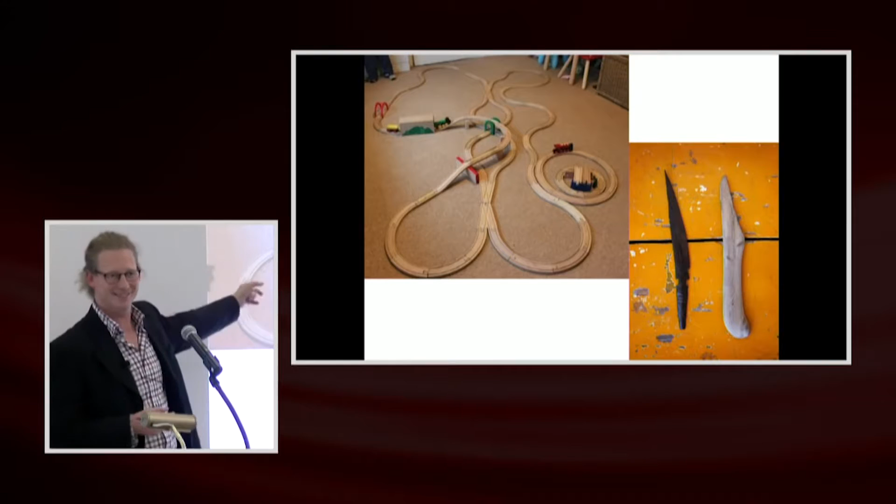In my life, as an engineer, I think I started off as a contractor, because first I started building. I started building especially trains in wood, the Brio. Then somewhere in my teens I moved a bit into manufacturing, fabrication side of things, and I tried to whittle letter openers and knives, but that didn't work out really well either. And then I moved into structural engineering.

And here I am on the site of the Metropol Parasol. I found that engineering is actually what I enjoy doing most, and where I enjoy trying to solve challenges and to keep challenging myself.

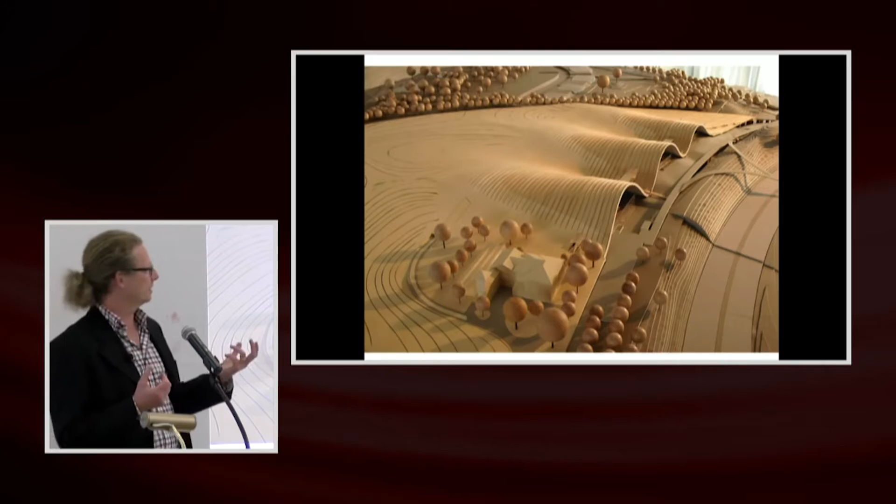To start off with some of the first projects I worked on, especially in the first five years in London, I worked on a wide range of projects, but there are a couple of common themes which slowly formed what I focused on in my later years. This is the Paul Klee Zentrum in Switzerland, which we did with Renzo Piano Building Workshop, which is a series of three hills in the landscape.

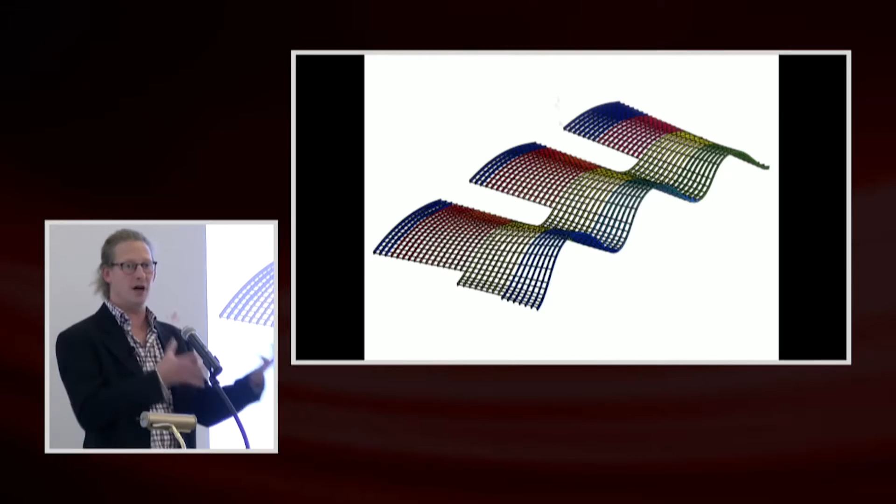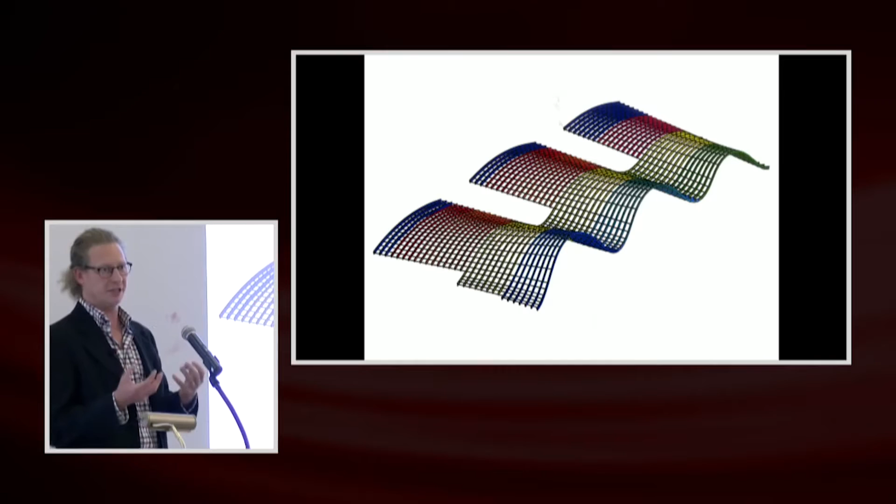And where I learned early on that geometry is key. In a lot of projects, geometry is really important in defining a clean and sound basis from which you can then move on and find structural and architectural solutions. Early in my career, working together with the architect, it wasn't really a common BIM model, because interoperability between software -- us working in Rhino and the architect in AutoCAD -- was still a bumpy road, but the intent was there to start off with one geometric model which we used for the entire building.

And here you can see the finished product of the steel arches and the undulation, and how they go back into the hills.

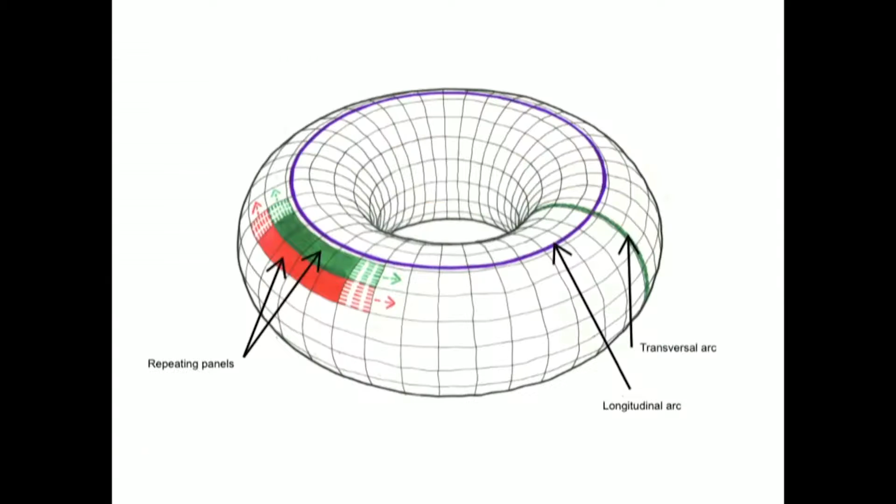Another project where geometry was also very important, but also constructability. This was my first foray into realizing that coming up with swinging geometry is all good and fun, but you also have to make sure that it's actually something constructible. Geometry still plays a large role, right? If the geometry is simpler, then the fabrication is a lot simpler.

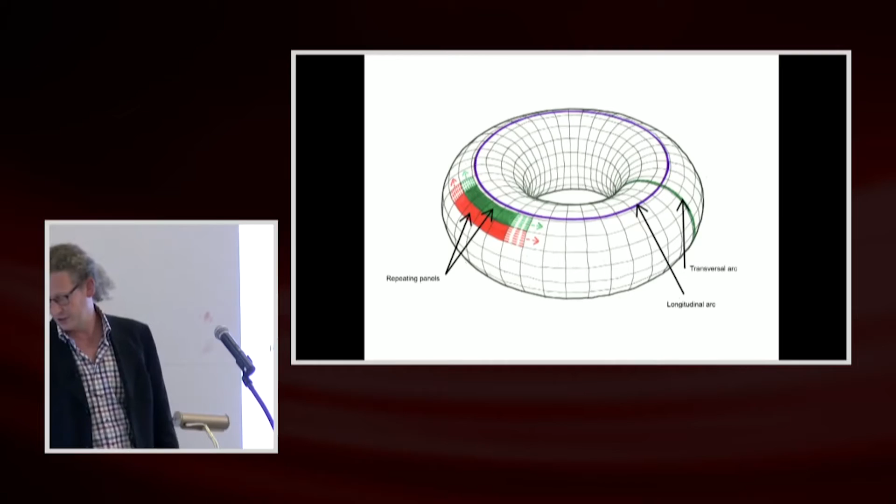Here, working together with the architects, even though this torus -- this donut -- has an immense radius, you boil it down and use tiny elements of that larger geometry to get down to the geometry of the building, and then move on to actually coming up with a solution, once again in steel, of this grillage which you can fabricate. Once the geometry is defined, you sit down with fabricators, sometimes early on, to come up with a solution for these canopies.

These are canopies in Portugal, down south in Vilamoura, for a port, for a yachting marina.

At the same time, not just concentrating purely on the geometry, but also looking at how figuring out the geometry influenced the structure, and how an architect and an engineer working together with the same geometry and the same model -- how does that collaboration work? Could we actually take it so far that two of us sitting at the same desk, working at the same computer, would that actually be a worthwhile effort?

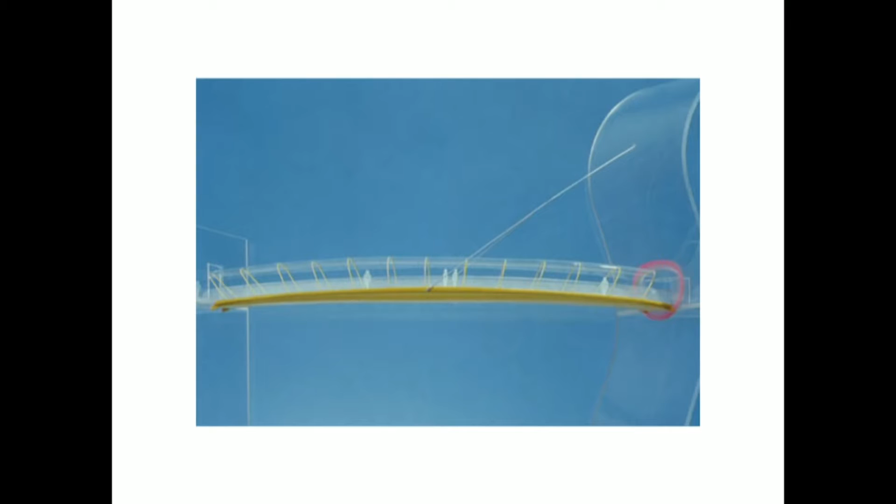I teamed up with Andrew Maher, an architect from Australia, who was doing research on collaboration of design teams, and we decided to take on a project. This is a bridge linking the Selfridges store in Birmingham with a neighboring building, and we decided: I'm going to come up with structural criteria, he's going to come up with his architectural criteria, and we're going to work on one model together. At the time we used CATIA, and we tried to optimize the structure to fulfill both of those criteria.

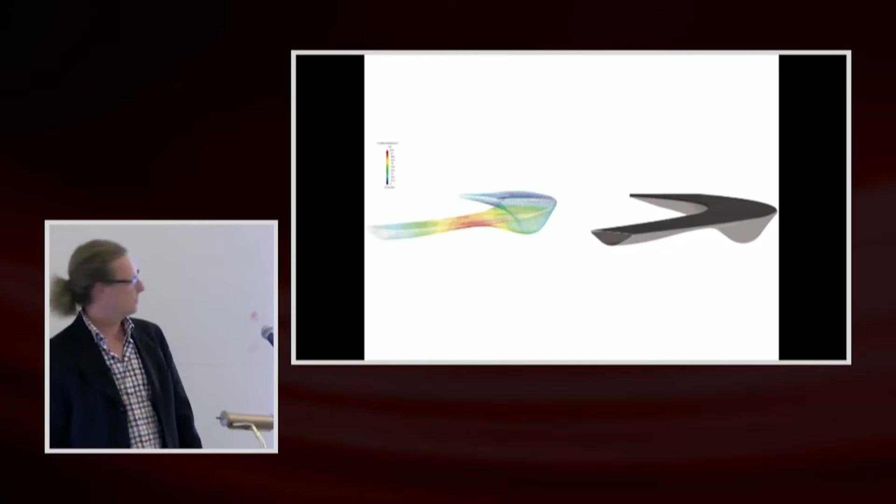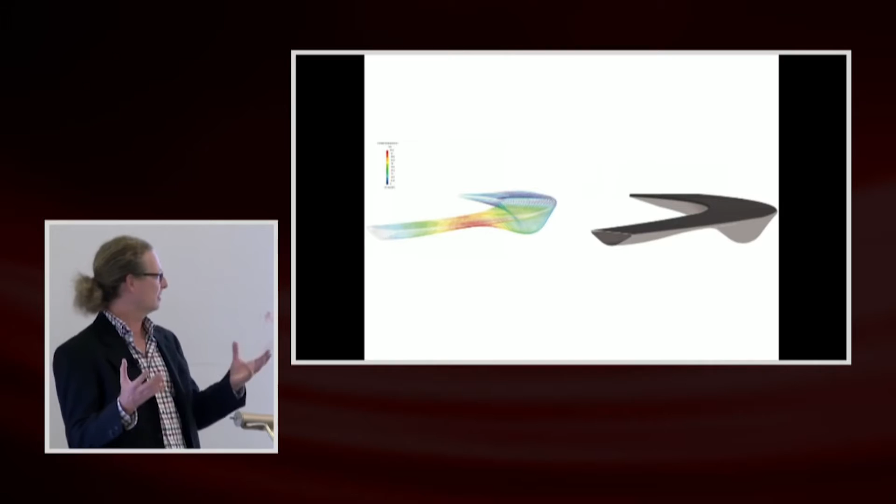It was the first run, and it kind of worked. We were also very lenient with our criteria. I wanted to have minimum deflections, and he wanted the aesthetics of the form. In the end, the solution we arrived at, both of us were kind of happy, but we noticed it was almost nearly impossible to 100% fulfill the two criteria we had set up at the beginning. But nonetheless, it was a really good experience, especially sitting next to each other at the same desk and communicating every now and then when the need arose, but actually working like four hands and almost from one body.

That kind of collaboration, team effort between engineering and architecture, we took a step further with a project in Hong Kong: the West Kowloon Cultural District with Norman Foster. At the time it was all one big development, one big project with all the museums and everything, and it was all covered by one large canopy. This canopy is about a mile long.

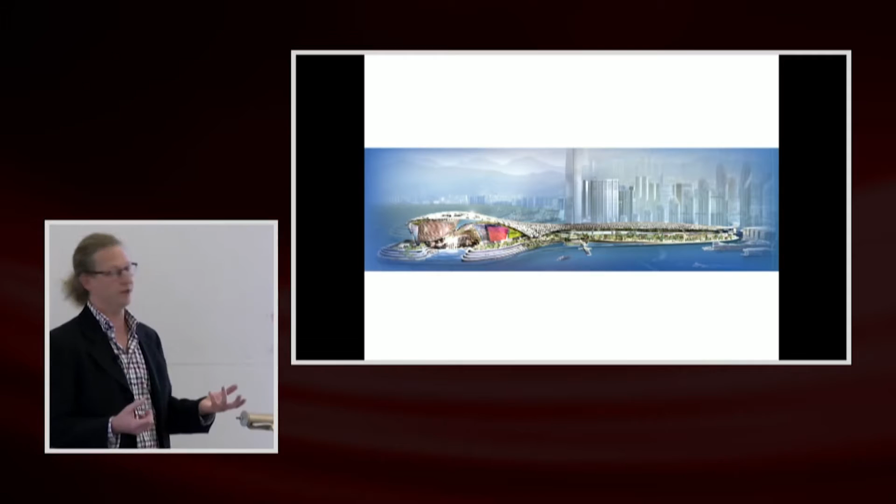During the competition phase for the developer, we set up a project office near Foster's office in London, where three of us from the engineering team were working together with the architecture team.

It was dictated for practical reasons. We had a timeline, we had a lot of things to work through, but also we were trying to find the most efficient design process, ensuring that all ideas are always thrown back and forth, and lighting up that design process to try to get as many ideas out of it as possible.

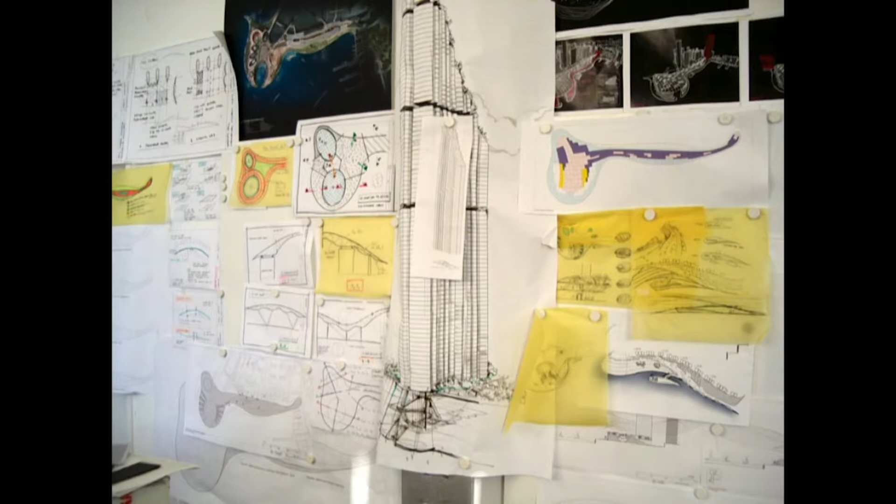We had a big pin-up wall where at any time, even if we were working by ourselves, it would go up on the board, and then we'd have almost every two hours spontaneous discussions at the board to go through what we were working on, or just get together spontaneously at the table and try to find solutions for all of these structures and that canopy.

On that project, it worked really well. It worked very, very well. Maybe because the design criteria for the project were set by the client, who had his list of things he wanted, and a lot of them were more defined by architecture, others by engineering, and we had to work together to a combined set of criteria set up by the client.

Moving a little bit into parametrics and optimization. This is another collaboration with Australian architects, a pavilion with a random geometry and the intent of optimizing the nodes, where the common geometry and an engineering analysis model, through an optimization process, then actually define the geometry of the nodes. So basically, where there's more material is where the forces are going through, based on the geometry of that random pavilion.

So each node is completely different, but also each node is a lot lighter, so we're saving a lot of weight because we're only putting the material where it needs to be.

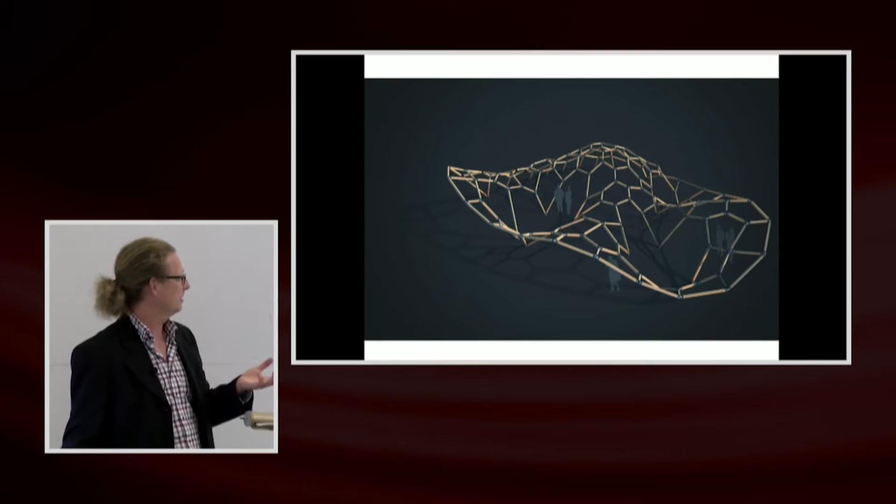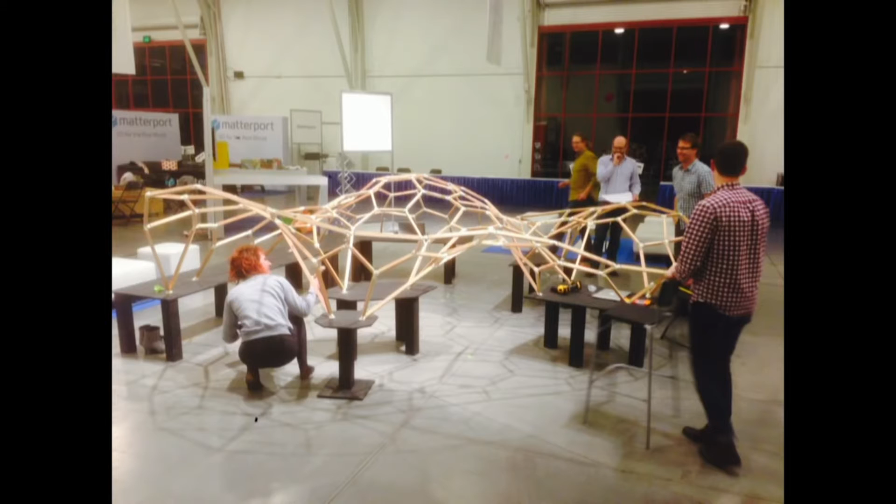We built a 1:5 prototype, which actually fit in his suitcase. He came from Australia to San Francisco, to Fort Mason, for one of the Autodesk conventions, and packed it into his suitcase. Then us architects and engineers together, we set up the 1:5 version. Here we found out that the erection sequence was actually quite critical, something we hadn't taken into account at all, because cutting and milling all the individual nodes, 3D printing them, was easy, but actually putting them together while looking at the Rhino model on screen was pretty darn difficult.

We also looked at the material for this structure, and these are all straight wooden elements, so the fabrication of those was also very straightforward.

So this little wood pavilion takes me over to timber, and to put it into perspective, this is kind of a historical timeline. This is back 2,000 years ago, and this is 500 years ago. It seems that actually what we're doing in timber construction, we're getting smaller and smaller, and we're not reaching what previously was done with timber in the built environment.

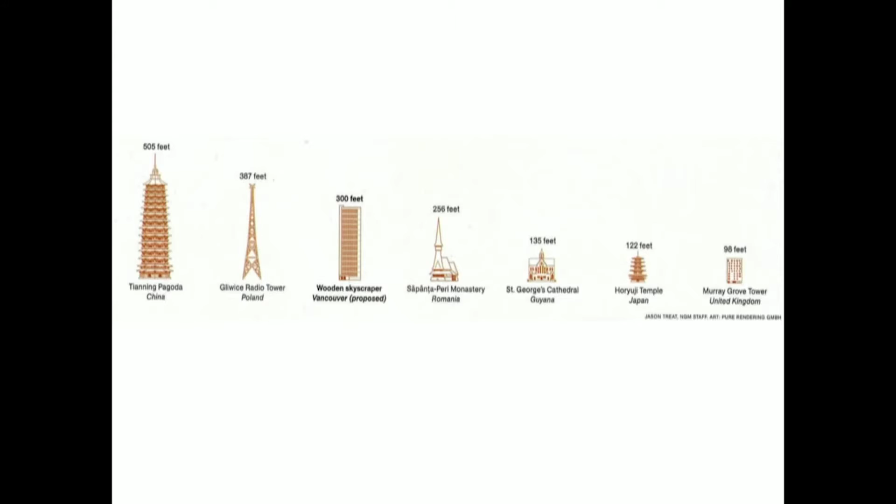There are temples in Japan, actually older than this, from the 12th or 13th century. There's stave churches in Romania. There are windmills in Germany, about 100 meters tall, which are now being built, so we're slowly getting back to that.

But timber can also be used as a reused material. You don't always need a new material. So there's a lot of facets of wood which fascinate me, where we can actually use it a lot more than we're applying it at the moment. This here is a sculpture in Seattle, made from wood of an old schooner, an old boat, which was put together for a sculpture.

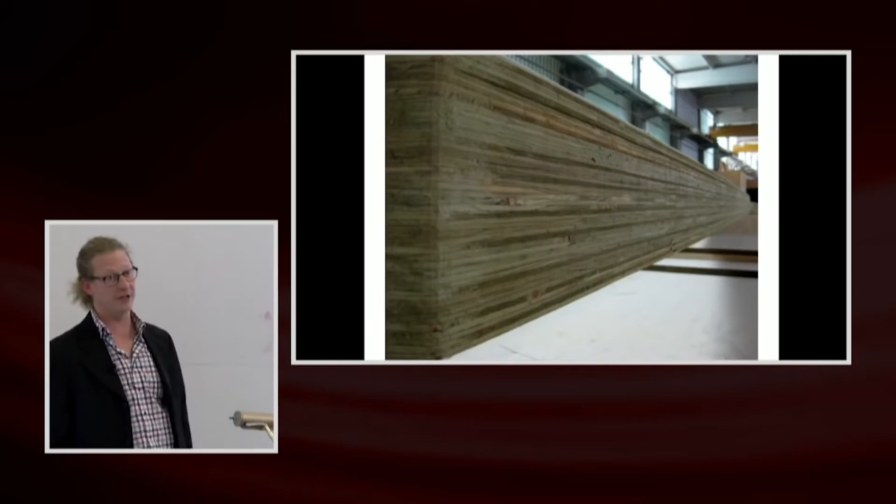There's a lot of engineered wood products out there. This is laminated veneer lumber, which has a lot of possibilities. I'll show that later for the Metropol Parasol.

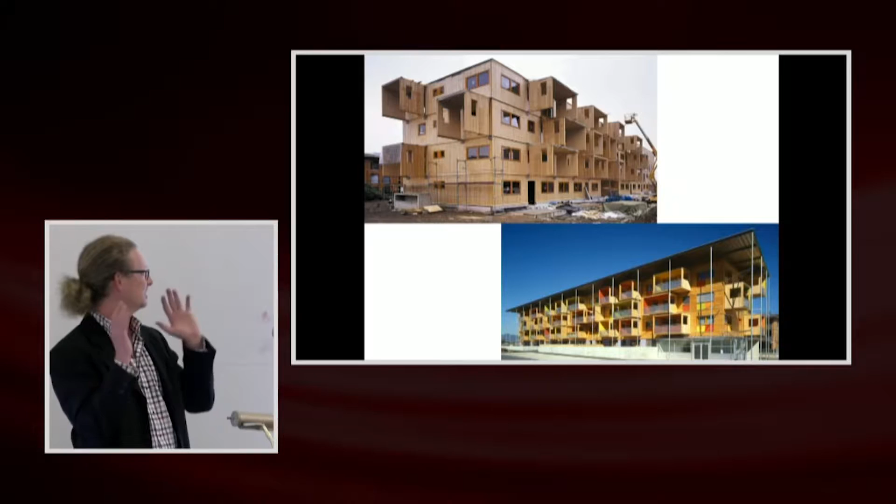But even normal residential construction, something which here is just normal stick frame, can be used with CLT. In Europe, a lot of these buildings—it's not something fancy, not something special—it's important residential construction built with cross-laminated timber.

Oh, sorry, am I not close enough to the mic? Yeah. Or I can move this a little bit. Yeah, no problem.

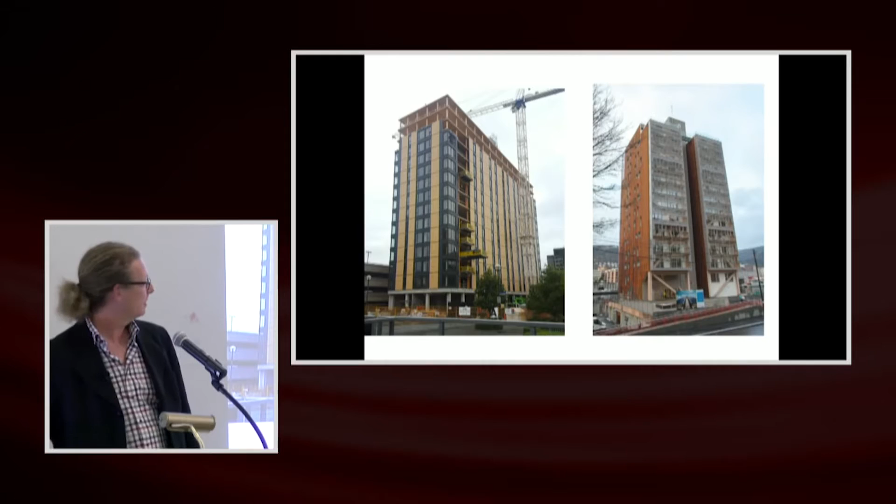In some projects in Europe and in Canada, we can see there are buildings taking us up 20, 30 stories with wood structural solutions. I started working with timber also back in 2002.

This is the Chesa Futura in Switzerland with Norman Foster. It's completely a glulam beam and column structure sitting on a steel raised table.

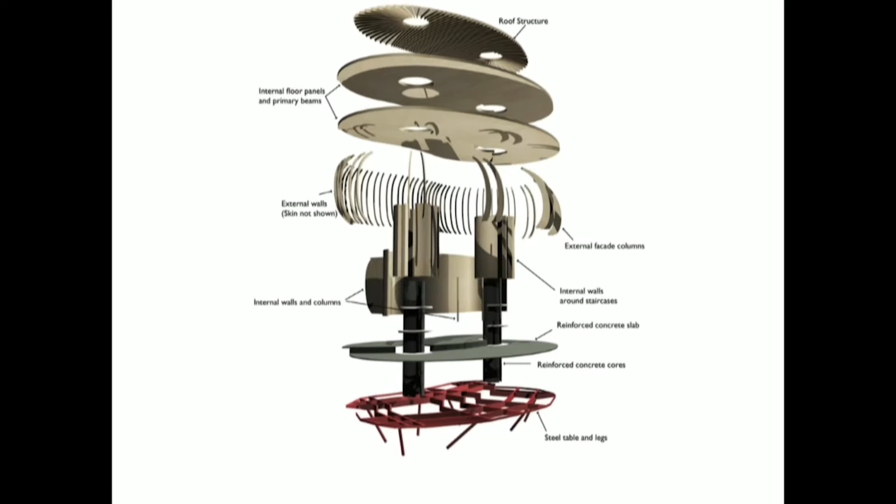This is a kind of first BIM model that we had for the geometry and defining the areas of common curvature. And here's the timber structure, where we also worked with the fabricator to figure out what was actually possible on the fabrication side, using those limitations to come up with our structural system.

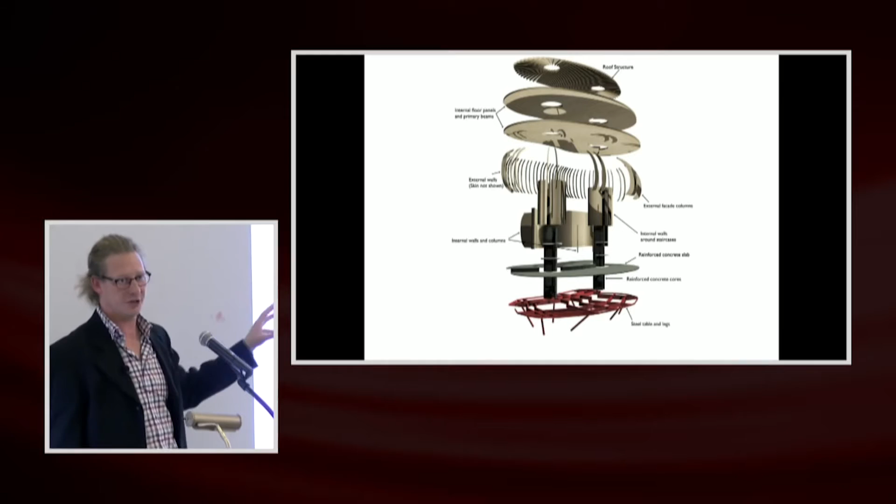Here, the strength-to-self-weight ratio of timber was really practical, since we were up on stilts and wanted a lightweight structure.

And also for the cladding, we also used wood. This is larch from the same altitude, cut by a shingle fabricator two villages over. This larch was used to clad the entire wooden structure and to protect it from the elements.

And then, in 2006, I started working on the Metropol Parasol. This is in Seville, Spain, for those who haven't seen any of the images. It's basically a large shading sculpture to shade a large plaza down in Seville.

The original site, when the design competition was announced, was actually a parking lot. So this is the square in Seville. First they thought, okay, we'll just build a shopping center. So they immediately started excavating on site, and then they found these Roman ruins—which shouldn't really be a surprise, since Seville was an old Roman colony, so you dig down 15 feet and immediately encounter the Roman ruins.

But it was good, because politically there was a new mayor elected, and he thought, up in Bilbao they have this beautiful Guggenheim Museum, and now Bilbao is all of a sudden on the map. I want something similar down here in Seville.

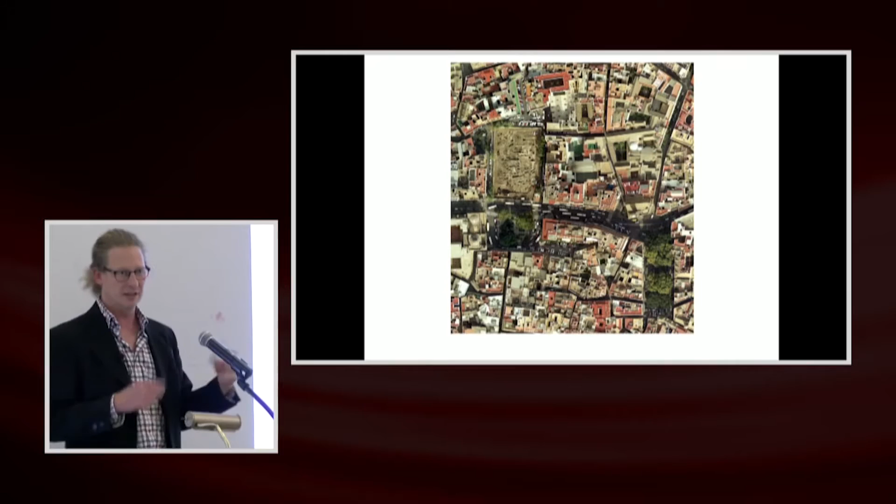So he announced this design competition, and we entered with Jürgen Mayer, an architect in Berlin, at the time more of a local young architect, and with this submission we won the design competition. You can see the original competition submission is actually different from the final built version, and I'll take us through that design process in more detail.

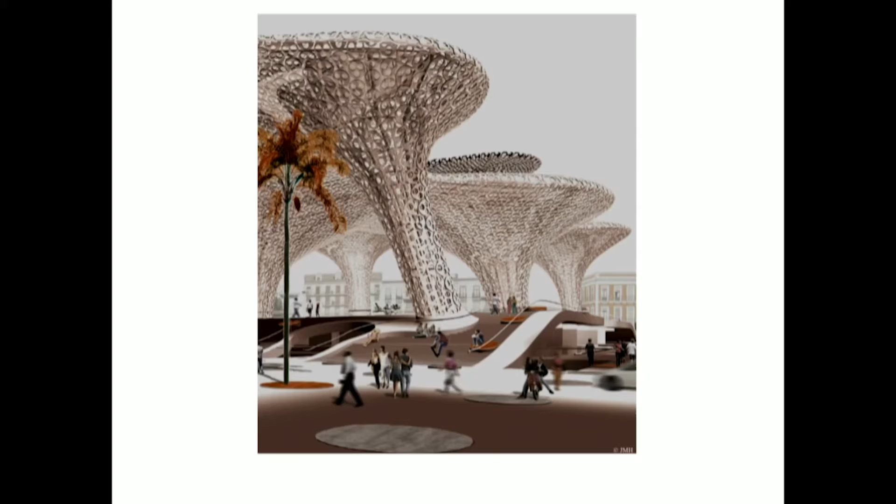The team composition was also quite interesting on this one. The architect was from Germany, Jürgen Mayer, ourselves, Arup, for the engineering, from Madrid, together with other offices. It was organized as a concession—a concessionaire won the project from the city and had a 40-year concession to build it, maintain it, and operate it.

And that was our client, Sacyr, who are more in the market for highways, bridges, heavy-duty civil concrete work. Nonetheless, they tackled this, and it proved difficult, but in the end we also managed to work with the contractor.

Quick overview of what is actually going on.

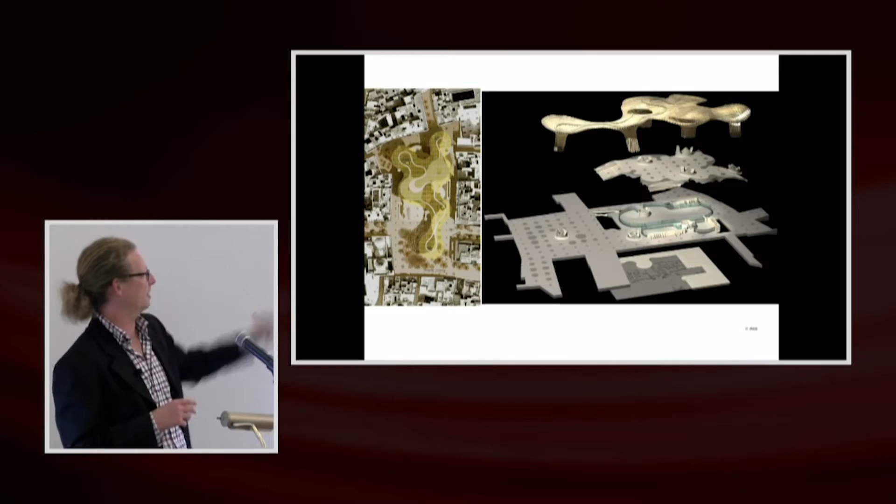In the basement, the museum incorporates the Roman ruins that were found on site. At street level, the entire plaza is refurbished. An old marketplace, a fresh produce market that used to be there, moves back in at street level. Then there's an elevated plaza over it, over the farmer's market, and then we have the parasols that shade the entire square.

At the competition phase, we were actually thinking more about a steel structure. We had these cores or trunks for the parasols, so we thought we could make those out of steel structures and then cantilever out and connect the cantilevers, kind of forming a space frame. But it was all based on cantilevers, and cantilevers aren't the most efficient structure.

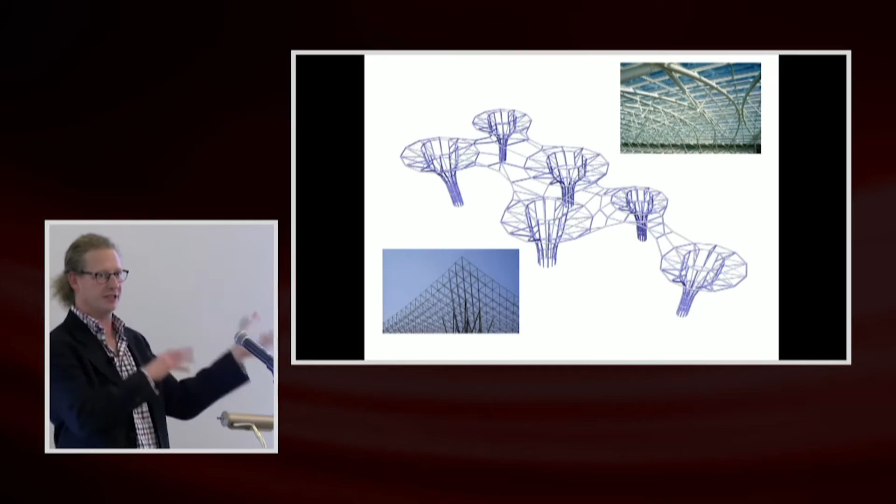And this was also a separation of structure and cladding, right? It wasn't really a holistic concept for this shape.

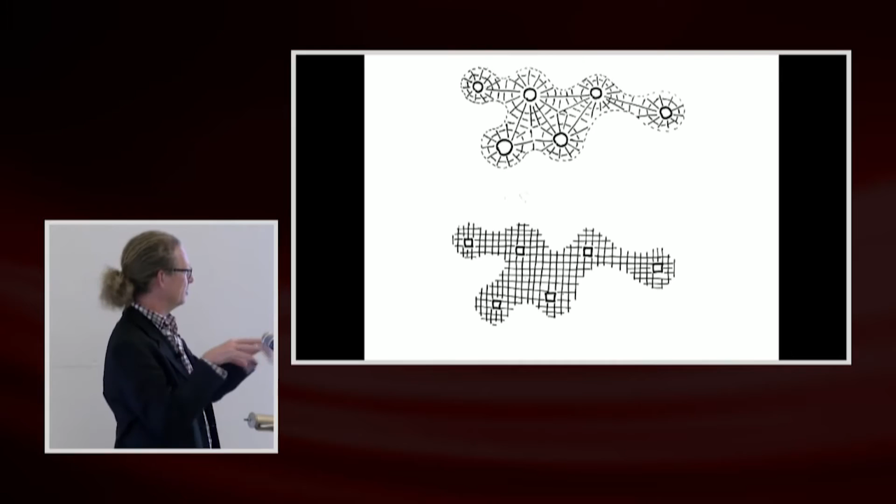So we started exploring many different kinds of structural solutions for these parasols. We looked at single layer curved structures, also doubly curved structures, and then finally moved away from the concept of having individual trunks or stiff cores, branching out to one grid, one concept for the entire parasols, almost like defining one grid and then just shaving away to form the final geometry.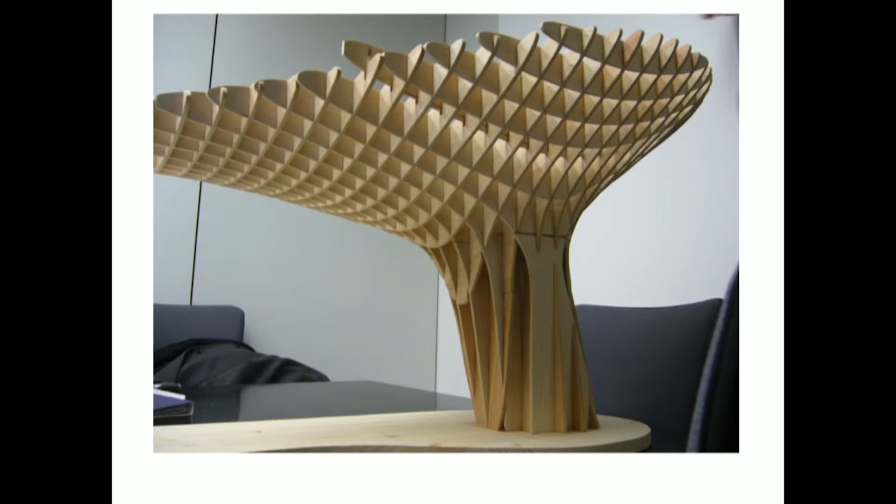At the same time, we were talking with the timber contractor, basing it on those balsa dinosaurs you get in a flat pack, which you take apart and put together in an interlocking fashion. So you're using really simple elements to come up with a very difficult geometry. The contractor loved that because all of the elements basically just have single curvature and can be cut out of rectangular panels.

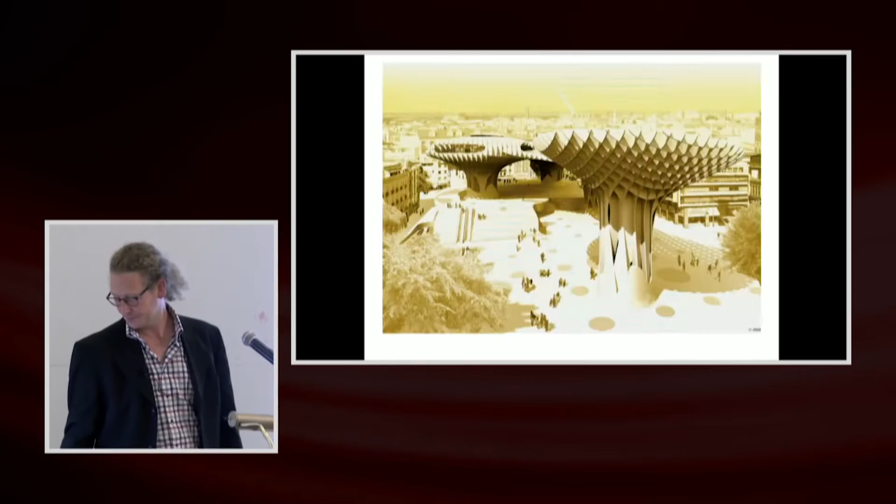So the original competition scheme actually changed, and we went back to the city and said, look, that steel structure which we came up with originally, that's not what we want. We have a more lightweight structure. This is also right because the parasols are mainly carrying their own self weight, with a bit of live load from walkways and a bit of wind. So the self-weight to strength ratio is really important.

Maintenance-wise, we took care of that by coating the timber with a layer of polyurethane. We then presented the city with this structure, this solution, and the first reaction was, 'Wait a second, timber? You want to build something out of wood?' Because in Seville, nobody builds anything out of wood.

But we managed to convince them, and then we moved on to start defining the structural solution, especially the connections for the parasols between the elements. The comparison I had previously to interlocking, that intercombing, doesn't give you enough stiffness, and you can't really transfer forces for the spans that we have for the parasols.

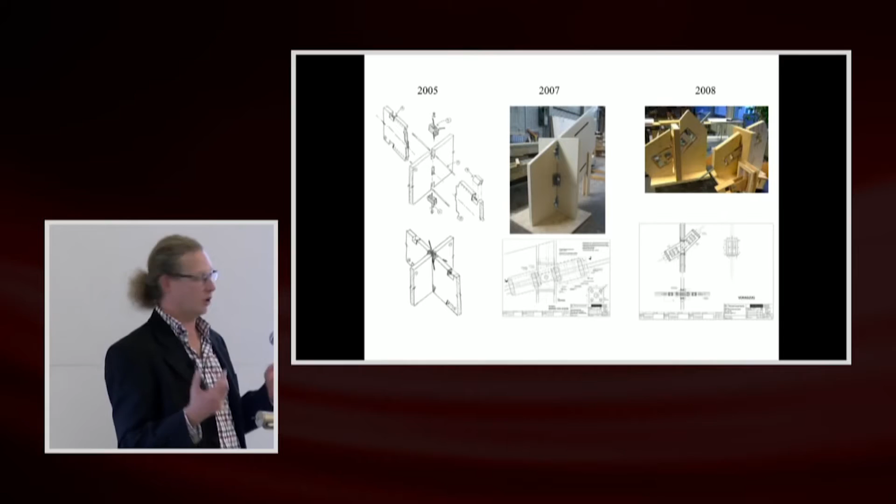So we had to come up with a solution which could transfer the forces but also did not add additional weight to the structure. Usually we just insert steel bars and transfer the forces, but all that steel we would have needed would have put more weight into the structure, and then we would have had to increase the size of the steel, and you get into that loop.

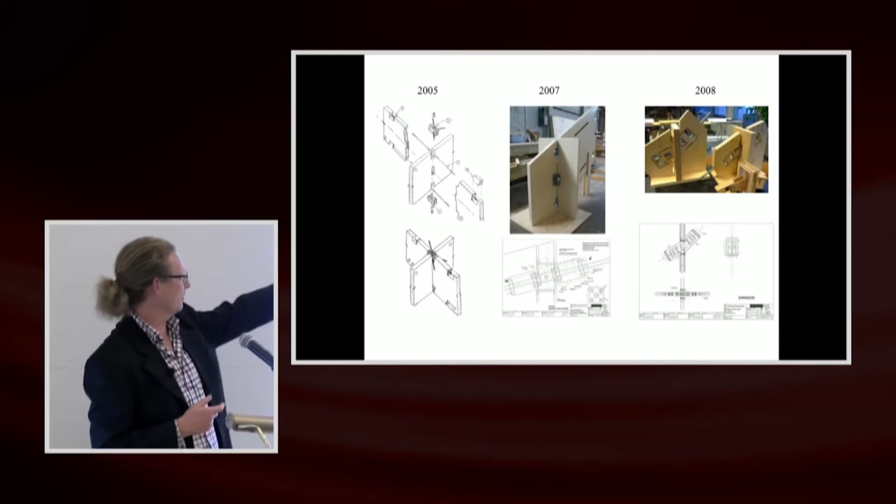So we had to look into variations of cutting away wood, or on the far right, even using wooden plates instead of steel plates, trying to find something that respected the original geometry, was lightweight, and could transfer the forces. Then we started talking with some epoxy experts who were mainly doing research in doweling steel bars and epoxying them into concrete.

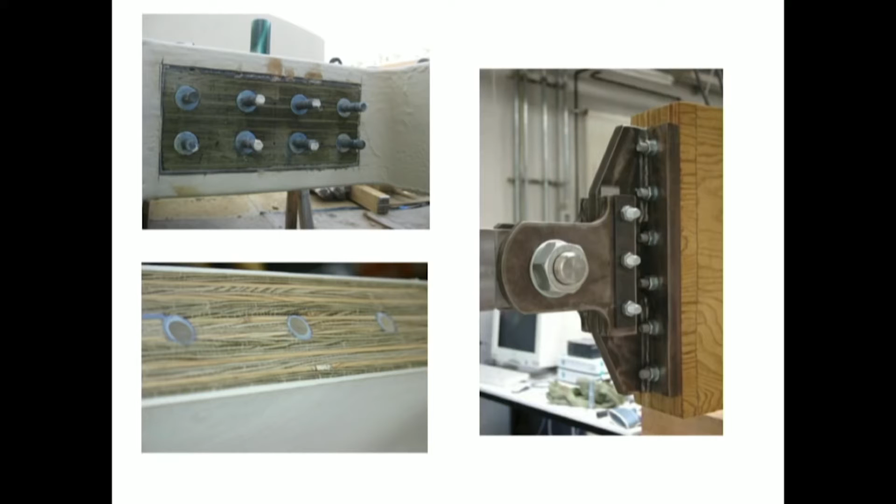Why not do that with wood? Why not insert the dowels directly into the wood and transfer the forces with epoxy? We came up with a concept for that and built our first specimen, which we then started to test, because there were no values, no code, nothing to really tell us how much force, or what kind of forces, we could transfer.

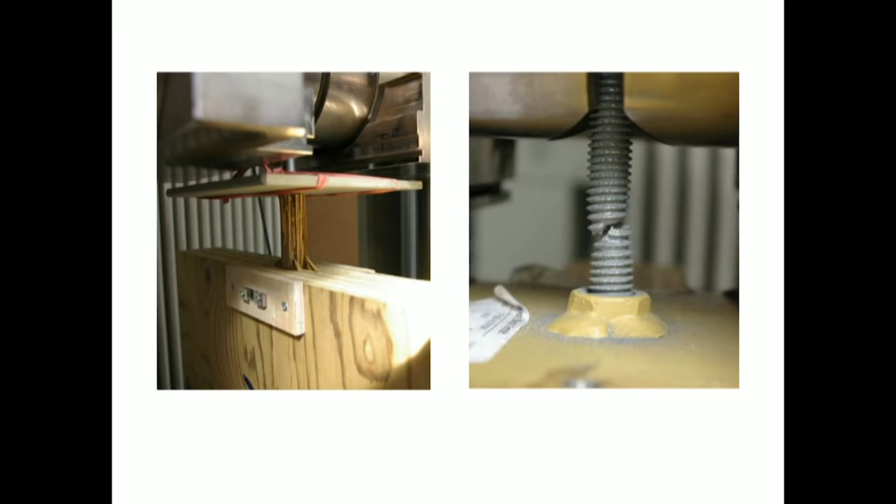Our first test failed. The wood is what actually failed, and wood gives you a brittle failure, a failure without warning. So we changed the grade of the steel and ensured that the steel, which gives you a ductile failure, would be our failure mode.

We also had to test it for heat, because in Seville it gets really, really hot, up to 120 degrees in the summer. And then, of course, there's also the radiation onto the steel and how it transfers down the steel rods.

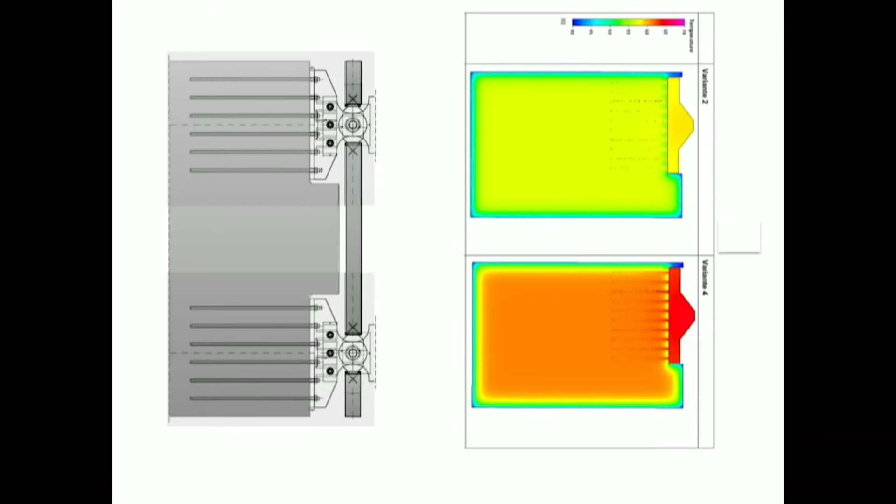But epoxy is an interesting material. We had to consult with experts from other fields and bring them in. You can cure epoxy on a molecular level and tell the molecular connections to actually resist higher heat. So you put them in a kiln, basically. You turn up the temperature, and it's a curing process for the epoxy. You leave it at that temperature for a while, and it actually resists the temperature you've fine-tuned it to. That happens on a molecular level.

So that way we could ensure that it could also resist the temperatures down in Seville. That was a really tricky one to convince the client, because they were kind of old school engineers sitting in the city building department. Luckily, one of the main engineers there was kind of mulling about the idea.

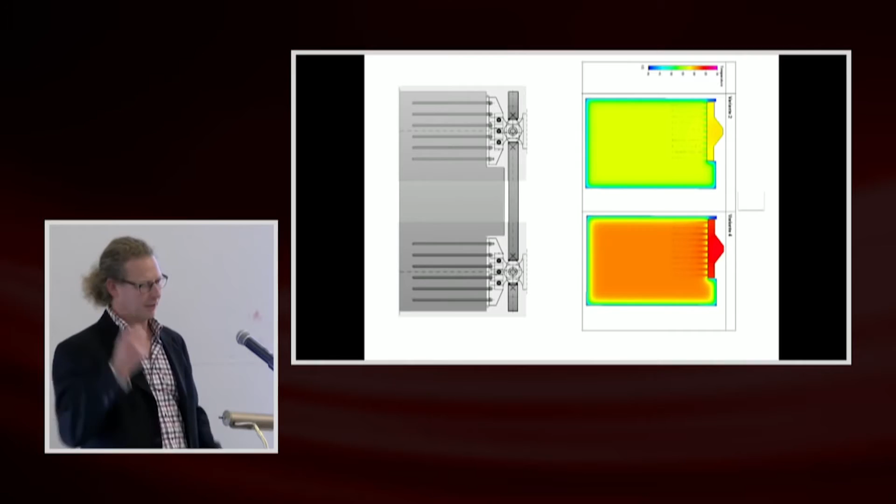So you're not doing a mechanical connection, it's actually a chemical connection, so how does that work? And the chair he was sitting on was luckily a brand new chair with no bolts, all glued together. He said, well, I guess if the chair I'm sitting on works with chemical connections and is glued together, then the parasols will work too.

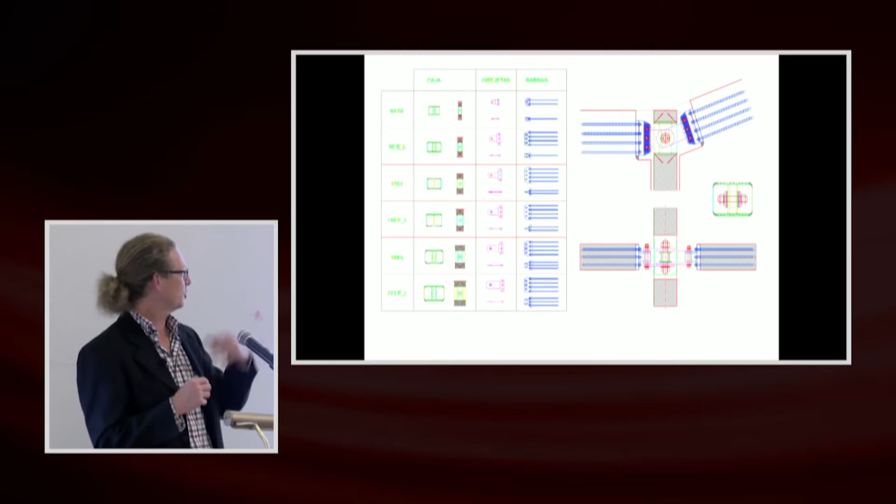So it was actually pretty easy in the end to convince him. We moved ahead, and once we had the solution, we went on to an optimization. Now we know how we can transfer the forces. It shouldn't be too heavy, but we also don't want 10,000 different connections. So we wanted to set up a kit of parts, and each connection is assigned a connection from that catalog. This is the first catalog we came up with, which just had 6 different connection types.

As we moved forward, we found out that we actually had to expand that to different connections, not only based on the forces that they transfer, but also the thickness of the wood element we're actually connecting to.

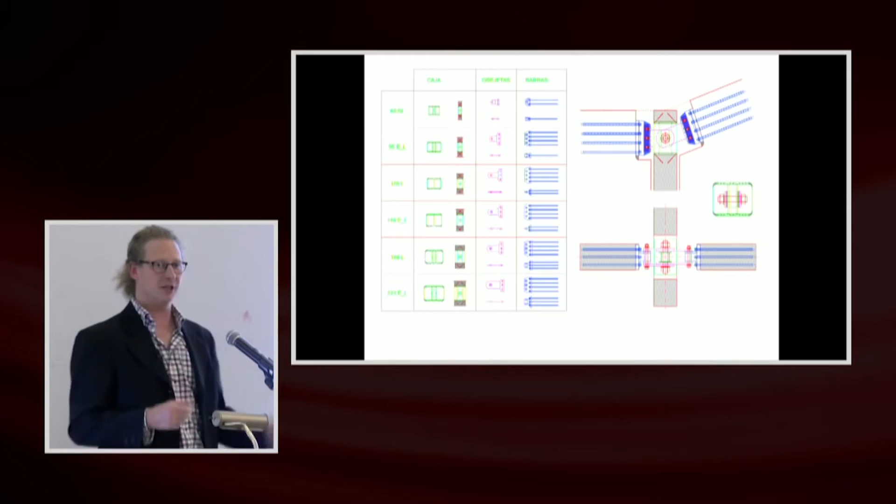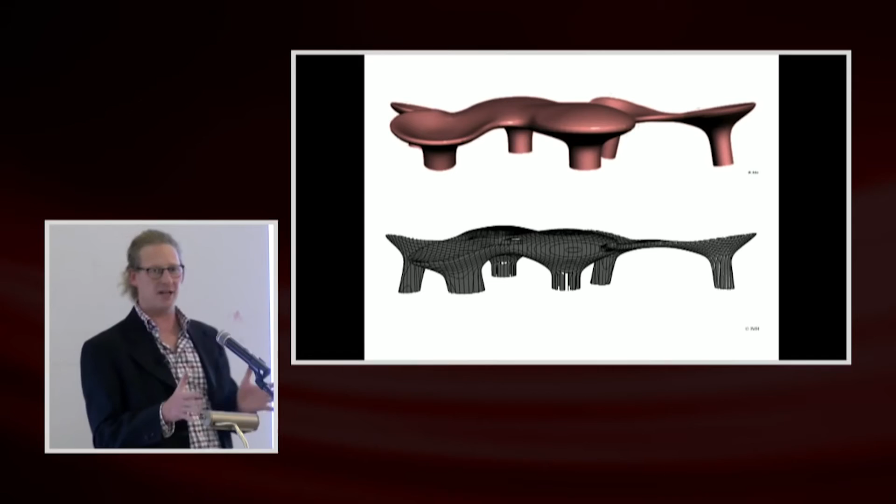So this is the beginning of our BIM model and the optimization loop that we went through. That's the architectural model in Rhino. It was fantastic because Jürgen did not change the geometry once in 5 years, over the entire length of the project. They defined it in Rhino and said, look, we need something that's constant, and they didn't tweak it at all. So while you might think, oh well, that's a pretty difficult constraint, it was actually really good because you had something fixed and unmovable.

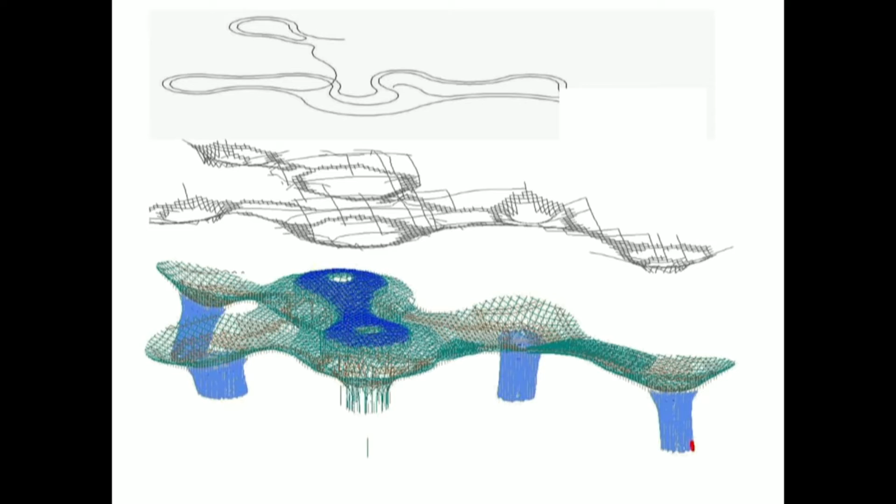So we imported that into our analysis software, GSA. Quick description of the software: it's basically a two-way spanning grillage of beams, but due to curvature, we also get some shell action. For in-plane stiffness against some of the wind forces, we also have steel diagonals which crisscross between the squares.

We tried to place those underneath the walkways, so there's walkways on top of the structure, so the visual impact would be minimal. Then you can see the four wooden trunks, and in the middle the parasols kind of open up. There's a cafe at high level, but that's a separate structure due to the high live load and fire resistance criteria. There we have a steel concrete composite structure and concrete cores, which house elevators for access and also for services.

So to actually optimize and define all of those connection nodes while always taking into account the weight of the connection, we linked our structural model to an Excel spreadsheet with Visual Basic. Then basically we started at step 0, and we gave all the elements the same thickness, and we gave them the simplest connection.

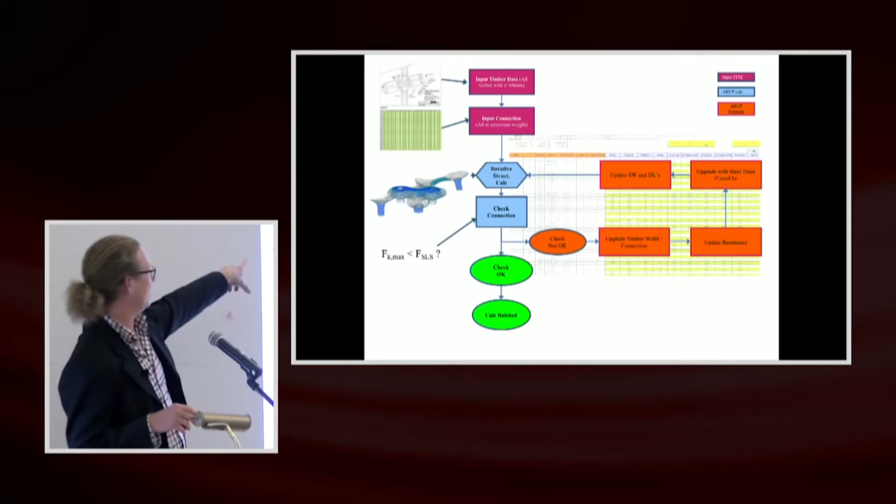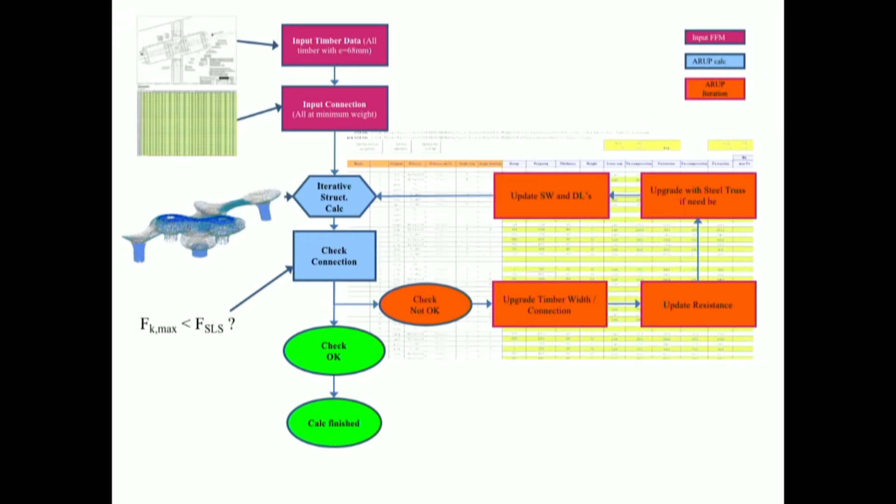One parameter which might have made it a lot more complex, but would have been nice to tweak in this optimization process, is the spacing of the beams. But the geometry was fixed, so we didn't touch that, and they're spaced at 6 feet on center.

For the timber contractor, we sent him the Rhino model and spreadsheets. The structural calculation spit out 12 spreadsheets for the different load combinations, and we literally did not submit a single paper drawing to the timber contractor—just one Rhino file and 12 Excel files. Mind you, the Excel files were about 700 megabytes big, a lot of data in there, but nonetheless, that's all they got.

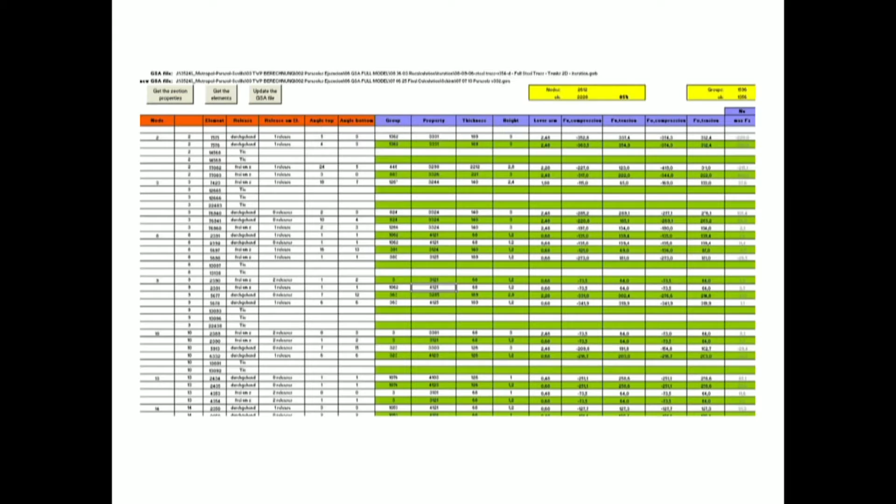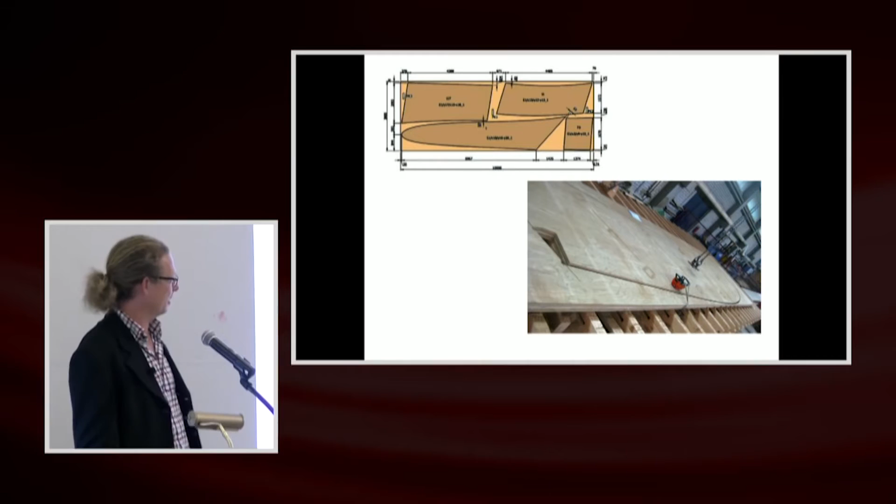And then it went straight into fabrication. They fed it into their system, going from Rhino into BoCAD. There you can see one of the overall panels of the Kerto laminated veneer lumber, the engineered product we used, and the cookie-cutter layout of the individual elements. You can see it being prepared in the shop, then covered with polyurethane to protect it from the elements, and lying on site waiting to be installed.

Moving ahead, the trunks were constructed first. It was pretty tricky because in 2008 there was the economic crisis in Spain, and luckily this was pretty much exactly where we were in 2008.

We were far along enough that the city didn't cancel the project, but at the same time they were always grilling us about every single design decision, wanting to make sure it was the most efficient and cheapest. While we were tackling this structure and still looking for the solution, they kept asking if it was even feasible, if we could even build it. We kept saying yes, we don't know exactly how, but we're working on it.

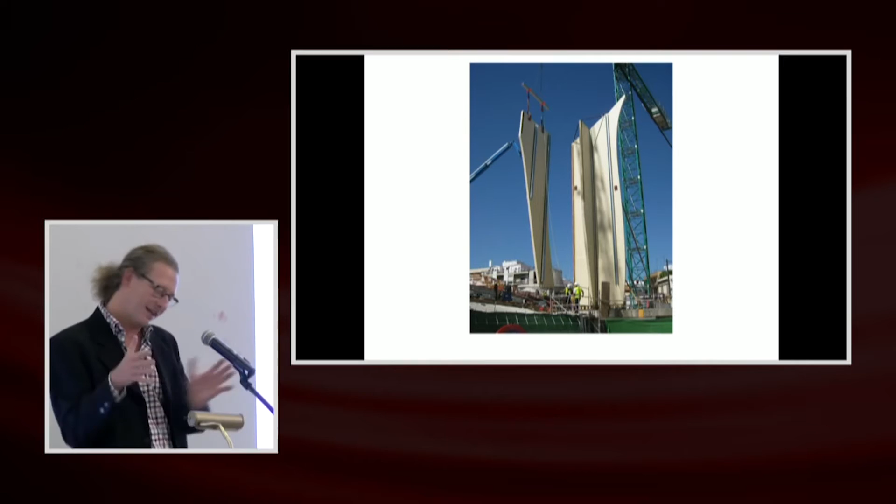So when these first 4 elements went up, it was a huge sigh of relief for us to finally get to where the client would leave us alone and just say, okay, now build it. But that wasn't true either.

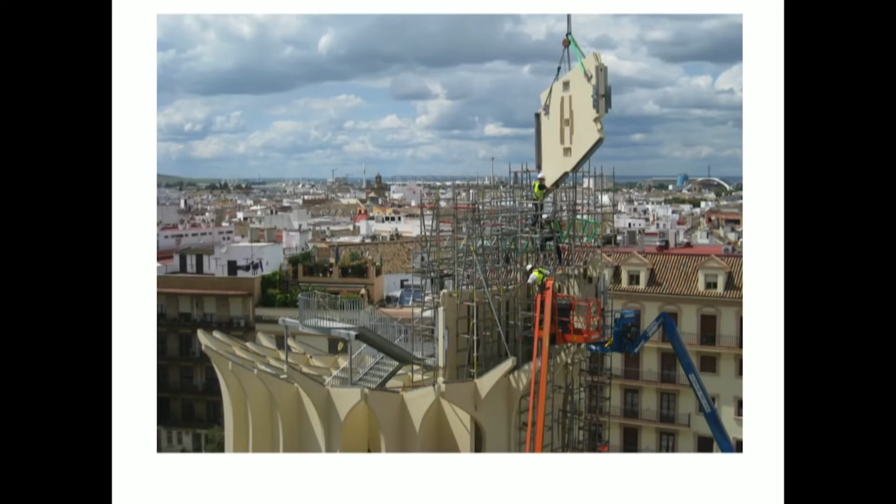The south of Spain is very political, and once people saw the timber going up, they were like, what is this monster, this is ridiculous, we don't want this in our city. The discussion started, there was a lot of negative press, and we just kept our heads down and tried to finish it off.

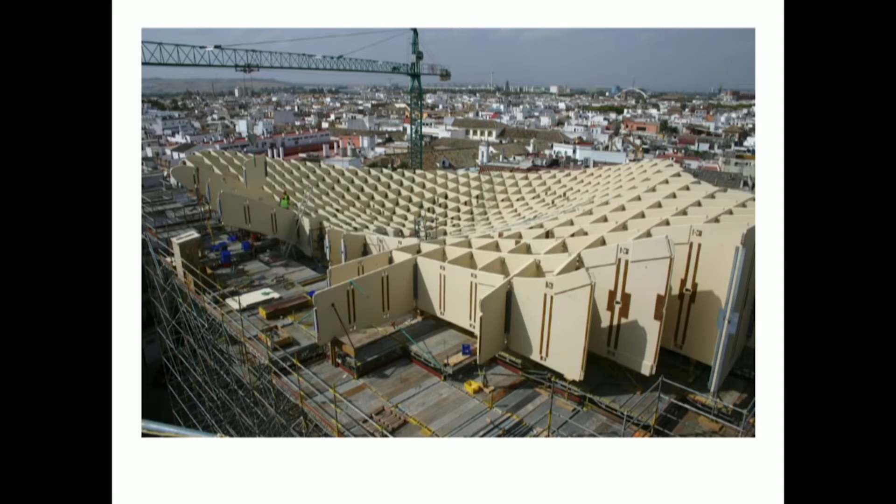About a year later, all the trunks were finished and we were starting on the actual upper area. Some of these elements are pretty darn big—3 times taller than this, and that's a strapping 6'10" Bavarian timber contractor. They built everything on scaffolding, and the temporary condition was obviously very important.

It's propped temporarily at pretty much every 3rd to 4th node, and the scaffolding also offers a working platform at high level for them to store all their tools. Slowly, from each trunk, we built outwards until all of these areas started connecting to each other.

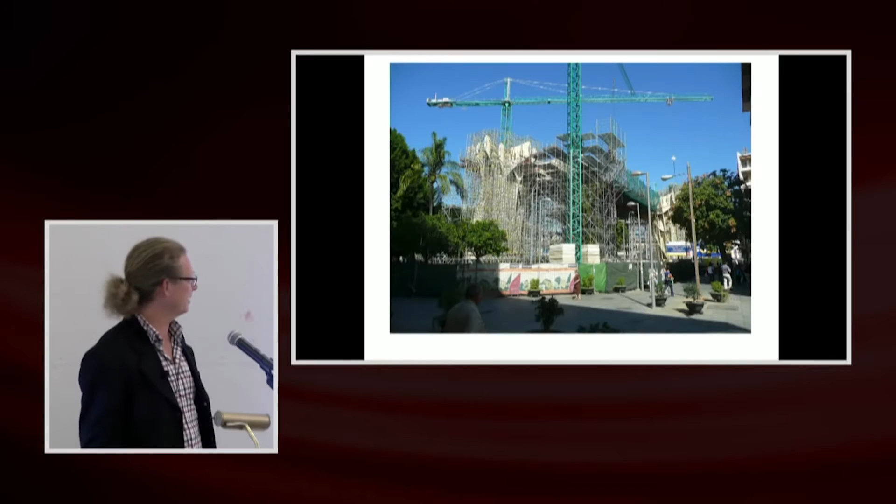Another advantage of our BIM model, the Rhino model, and the spreadsheet we sent them is that we had built it once before—I think I got about 2 RFIs on this project. The timber contractor just went out there and built it. It all fit together beautifully, with minimal glitches on site.

That went really well, which was good because we then had a political deadline before the next election cycle. There's an 8-week period in which no politician can partake in any public act like opening a construction site, because it could be seen as influencing the politics. So on the 23rd of March, we basically had to have this project finished.

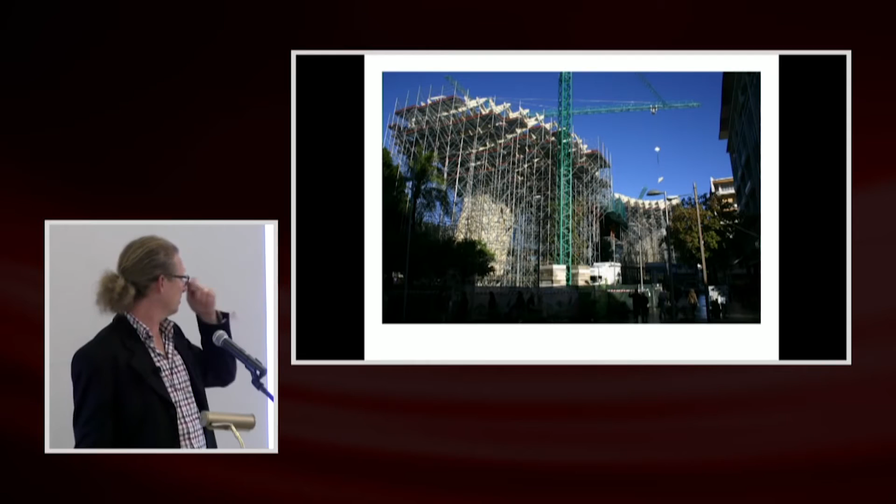It was quite tricky, but luckily the contractor moved ahead pretty fast. Here you can see, I think, the last piece hanging in the crane, being put in place. Then on March 22nd they took away all the scaffolding, and the parasols were pretty much finished.

Here are a couple of last pictures of the square actually in use, not as a derelict parking lot—the walkways up on top. On the right-hand side is the cafe, where the structure opens up, and the walkway goes over it. The connections are all visible; there's no plastic plate covering them to give it a flush finish or anything.

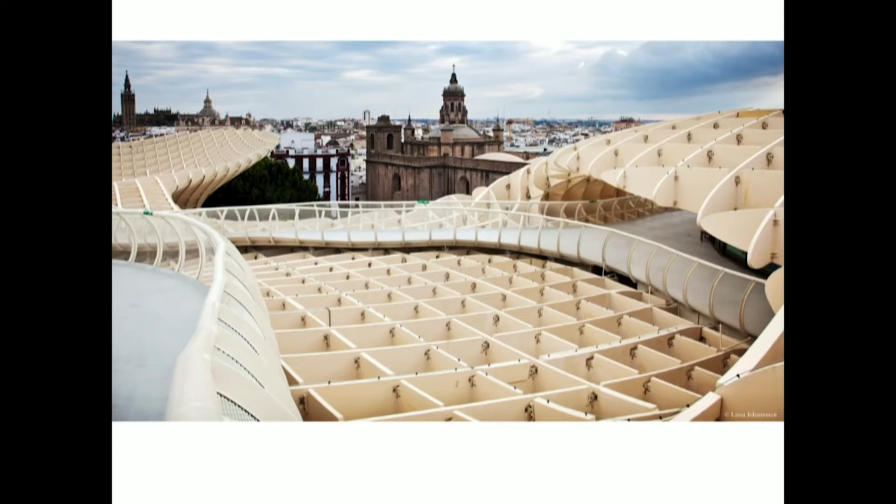Jürgen, we spent 6 months developing this connection, and it's an important part of the parasol. So he also wanted it to be visible.

That project showed me that even if the solution at the beginning isn't completely clear, and even if all the design team members and the client at first seem like a very difficult team, the political environment was really tricky and trying to influence us, if you just put your mind to it and keep challenging yourself, you can actually come up with a solution and finish off a project.

In the end, it took 6 years. I was in Madrid for 7, and 6 of those were almost working full time on this project. But of course, on opening day, all of us were together, having champagne and smoking cigars up in the cafe.

Moving forward to some of the other timber projects I've worked on, and now working on with Outlook down the road, this is the Life Cycle Tower in Austria, which we also developed with a contractor. Here it was about finding a modular, prefabricated timber system for office buildings, and looking at hybrid solutions. So we have a concrete slab, but we're using glulam beams, and we're prefabricating these modules with the idea that once you go on site, you're super quick.

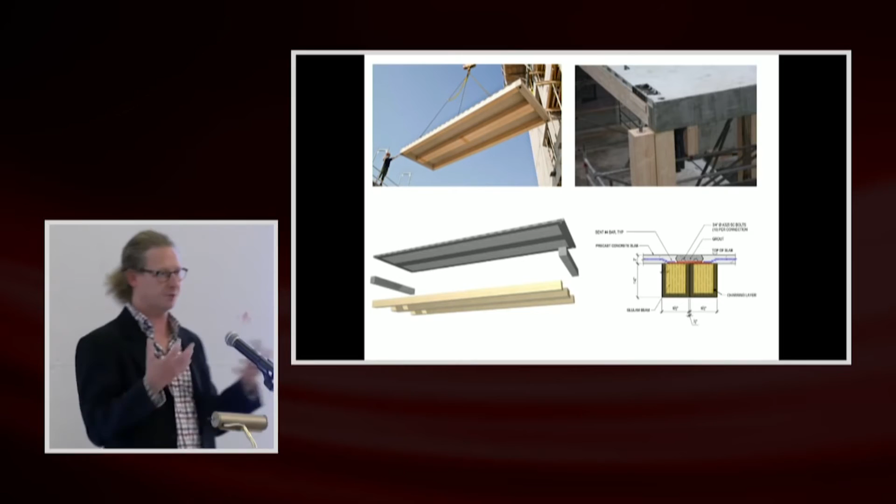And we actually did. We built a story a day. The concrete core went up first, and then the rest of the building went up in a week. With minimal environmental impact because it was quiet, because you're basically just doweling and nailing wood together. No dirt because everything was prefabricated and pretty clean, and minimal tolerances.

So really good, a lot of advantages, speed to market and getting something done, but very dependent on fabrication, manufacturing, and the whole supply chain for getting this erected. So if the market isn't really there yet, how can we push more timber and more wood solutions to be applied in the market, in the built environment?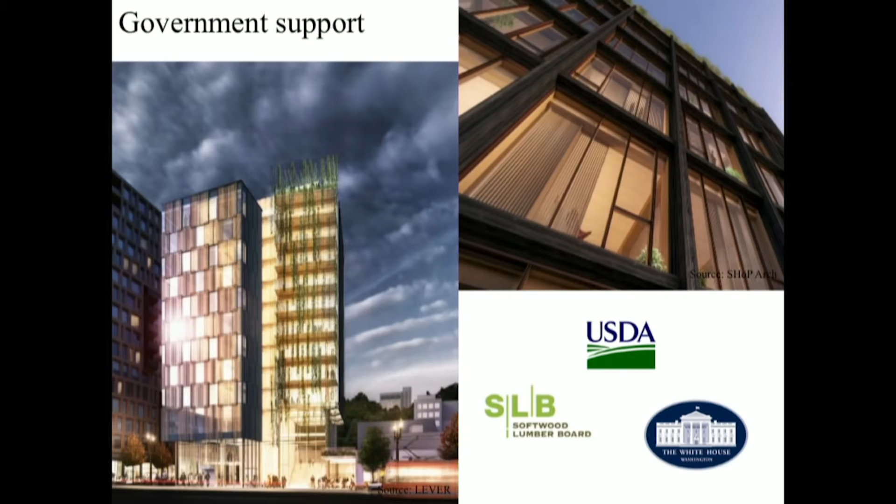Government support at the moment, the White House is spending $2 million. There's a project in Portland, the Framework building, an 11-story residential tower, and there's one with SHoP Architects in New York. We're on both teams, and the additional money needed to overcome code hurdles, approvals, and testing is being funded by the government. They're saying that wood actually is a material. It's under the USDA because forestry is actually a type of agriculture. It's a product, and they want to support that industry.

For both, we're going further, and the lateral system, the cores, are also with wood. There's nothing at the moment in codes which gives you a codified lateral system, neither for wind nor for seismic. You can only do cantilevered columns. You can do braced frames in Canada, but in America you can only do cantilevered columns. So obviously, you need to do testing and actually show that the system works.

The Framework building is going ahead really well. A lot of the fire testing is being carried out. Besides just the structural and seismic resistance, the fire is also something where the authorities want specific testing. That's going ahead, and we're meeting all the requirements. The one in New York is about 6 months behind, but also moving forward.

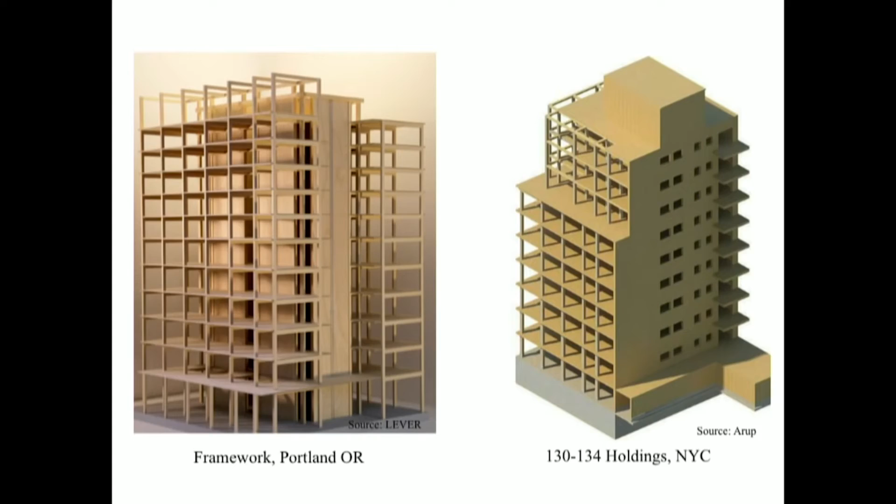So these are almost demonstration projects for the industry, for us as designers, for architects, for engineers, for students, to show that these projects are possible. And we also need to demonstrate and prove that these solutions work for acoustics. This is the project we're doing in Amsterdam, a 10-story tower where the fire protection system, acoustics, vibration, and all these other factors show that there are solutions out there that work.

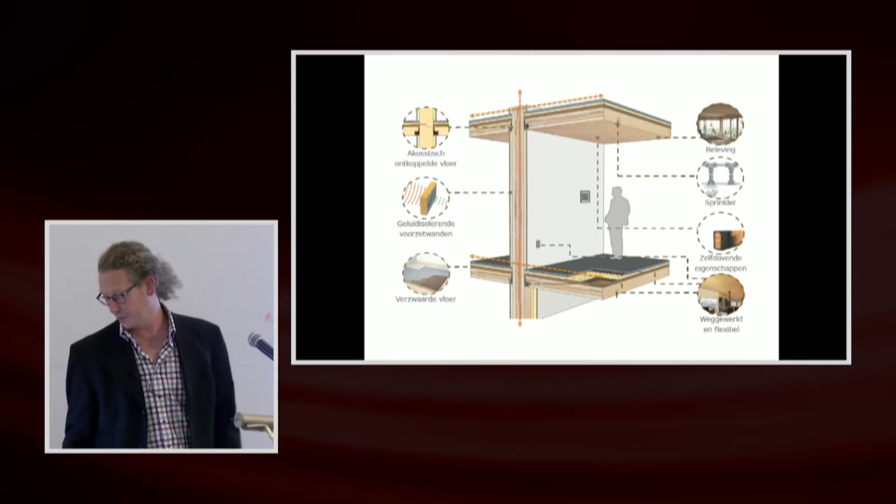But mainly, we're doing a lot of research. Like I mentioned, understanding how these, for example CLT, which is a new product now in the IBC, but there's only one manufacturer in the States, up in Oregon, D.R. Johnson, and so how it actually behaves in fire is not completely known. The individual material itself, CLT, yes, but what happens when you put it together? What happens when you support it on glulam beams? What if you have two CLT walls and a CLT ceiling? Is there any heat that radiates and fuels the fire on the walls? So all of these different assemblies have to be understood, especially because they influence the insurance.

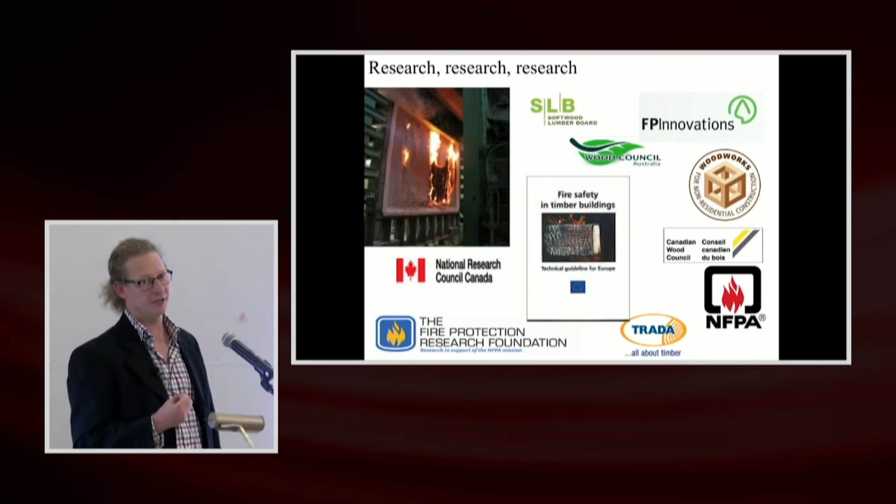The insurance industry, which insures buildings—if you're coming up with a completely new solution, you're going to get high rates, and so clients and developers aren't that interested. But luckily, the NFPA, National Fire Protection Association, is funding research to better understand how it actually behaves. And most of the results are very, very positive.

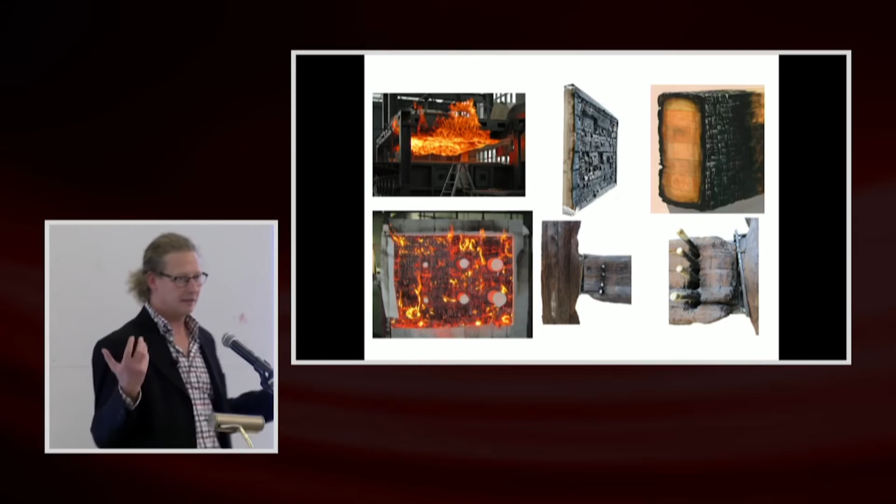Mass timber forms a charring layer. The typical example is you've got to throw kindling on a fire to light it—you can't throw a massive log on it because it'll never really start. Glulam and CLT behave that way, forming a thick charring layer and protecting the rest of the material, which you then size for the structural demands.

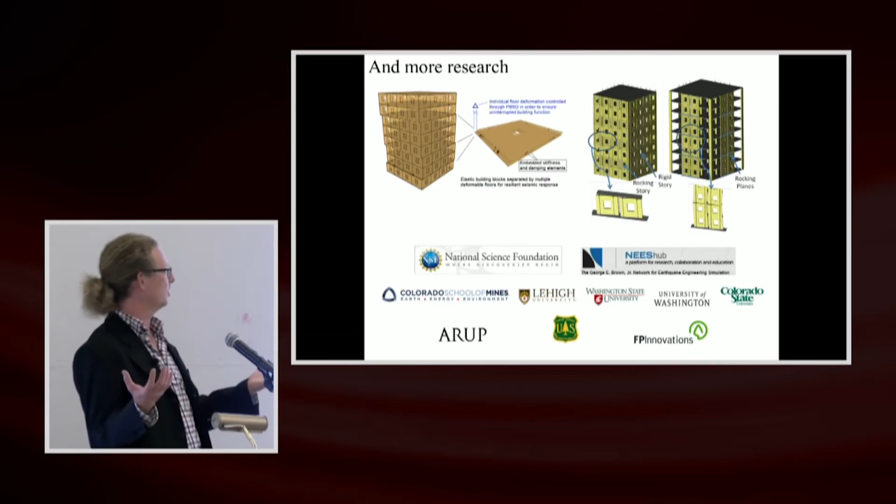And research in seismic systems—if there's nothing in the toolbox of designers, if there's nothing available, then we're teaming up with universities, especially up in the Pacific Northwest, to look at systems using CLT and other engineered wood products for lateral solutions.

One example is a post-tensioned rocking wall. You've got the CLT panels and the post-tension cable in the middle, which basically ensures that it goes back to its original position after having displaced following a seismic event.

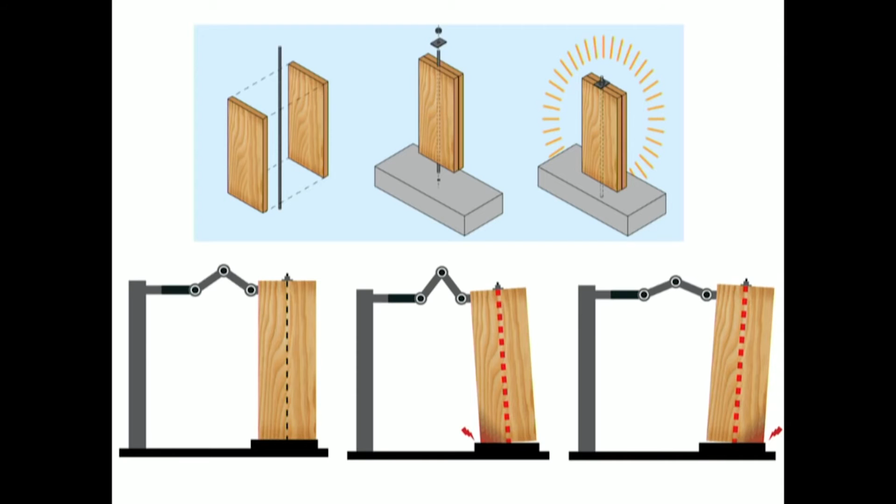Or one that I was involved in, and we finished the initial testing just a couple of months ago, is a heavy timber BRB. BRBs already exist—it's a buckling restrained brace, a certain system which exists as a steel solution. But we're applying that same principle and idea, using a heavy timber version where we have a steel core and a glulam casing, and the casing ensures that the steel core does not buckle.

So trying to put even more possibilities in everybody's toolbox.

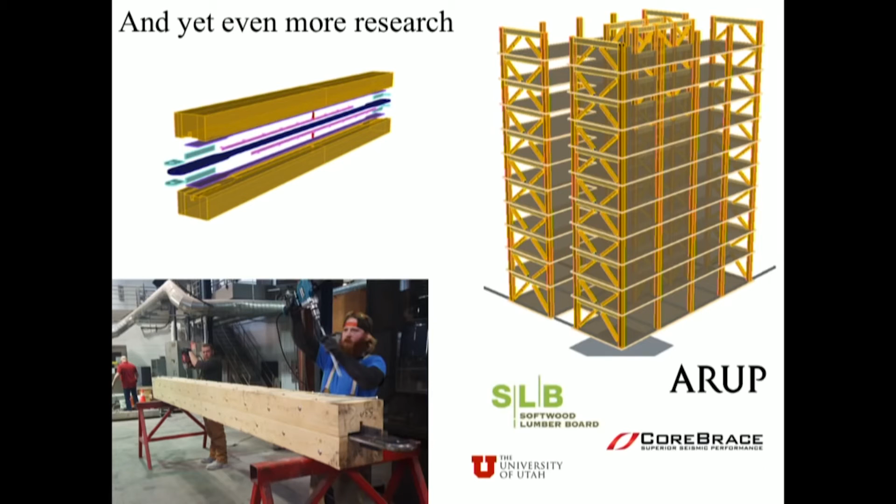And so for that, we just did some proof of concept testing. We teamed up with a manufacturer and a university, the University of Utah, put together some specimens, and these are the results of the different variations that we tested.

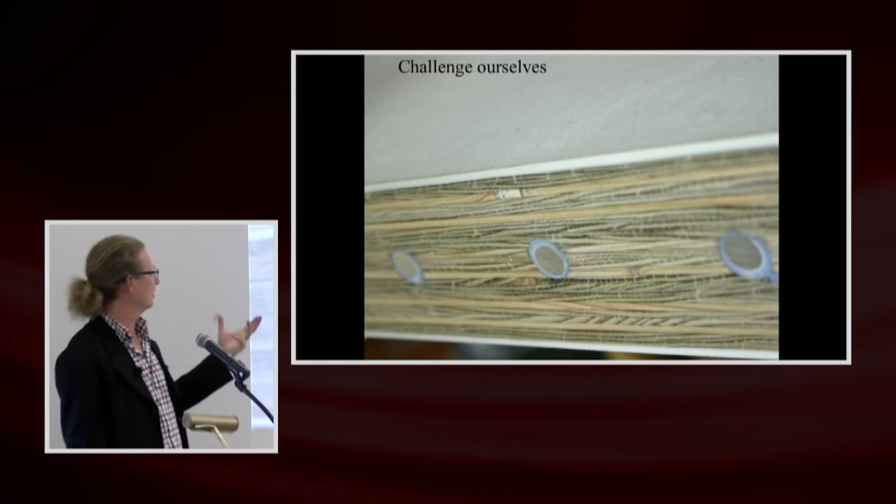So to finish off, I think, thinking about hybrid—combining materials that maybe hadn't been combined before. For example, laminated veneer lumber, epoxying bars into the wood, and then covering it all with a layer of polyurethane to protect it. That was bringing different industries together which hadn't worked together before, and sometimes forcing them to work together—the composite solution for the life cycle tower.

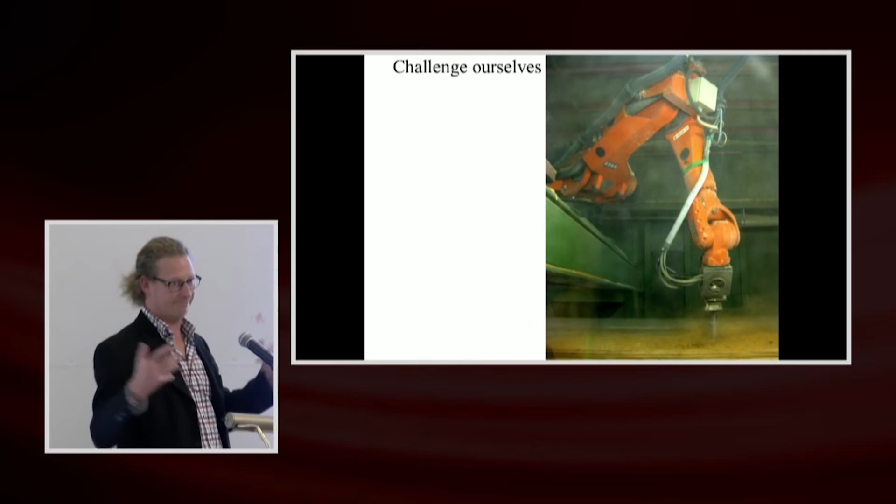I think, Mark, you mentioned this—this is a new team member, the CNC robot for the Metropol Parasol, and we had to actually take him in as a team member and think about passing the information onto a robot. That robot was working for 365 full days cutting out all of our elements. So as different technologies emerge, different people—and computers and robots—are joining the design team.

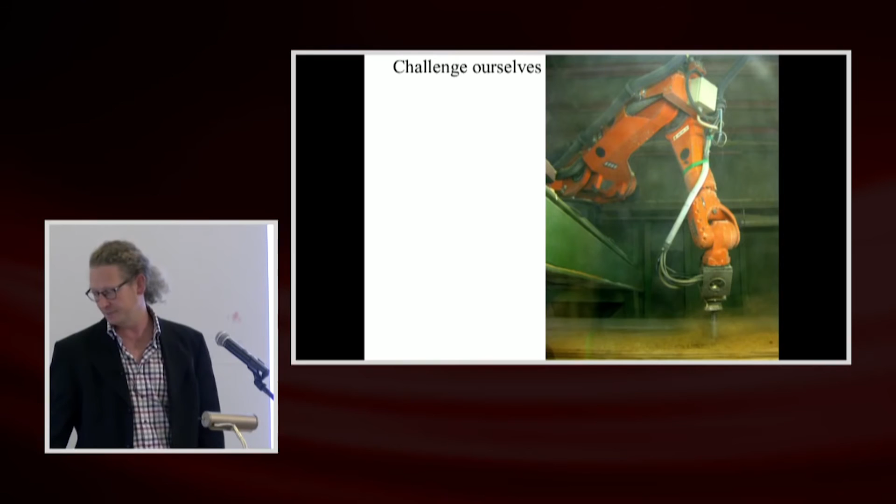Something I learned at the latest timber conference is going to the level of nanotechnology, saying, okay, wood is wood, but why can't we try to change it and actually put some metal in there and make it magnetic, or make it transparent, and how can we use these changed material properties in the designs we're looking at. That's on the nano, molecular level.

But I also then walked by a nail manufacturer, and he's like, no, nails out of steel? Yeah, everybody thinks nails are made of steel, but actually we can make them out of oak. I'm like, oh, wow. So sometimes very difficult, tricky, research-intensive challenges are what we need to go for, and sometimes it's just questioning things that we accept as normal but can actually be carried out in a different way too.

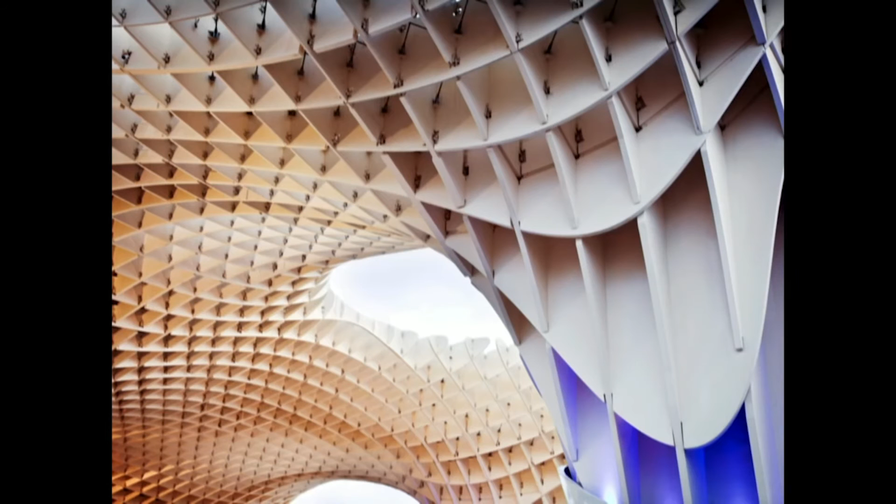And then maybe, on the timber front, someday we'll actually achieve heights in our projects and complexities that Mother Nature has already arrived at, but we still have a long way to go. And that's it. Thank you.